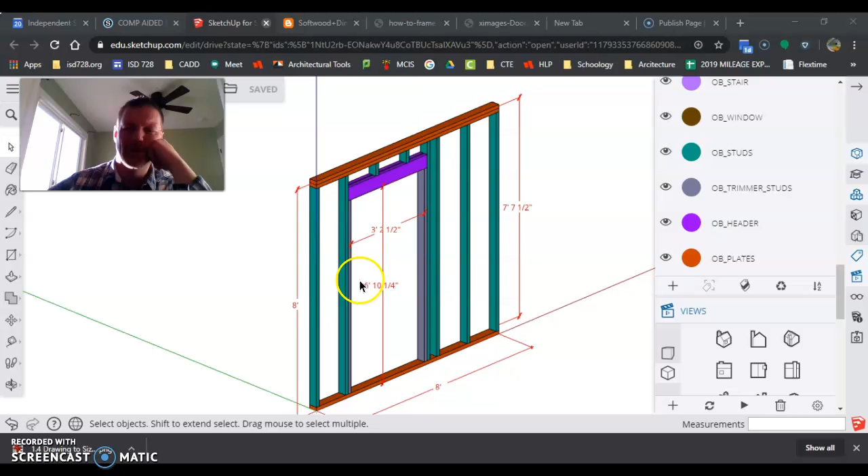We are moving forward now. We got our cripple studs in, we got all our objects on the right layers. Now we're going to put the sheeting on.

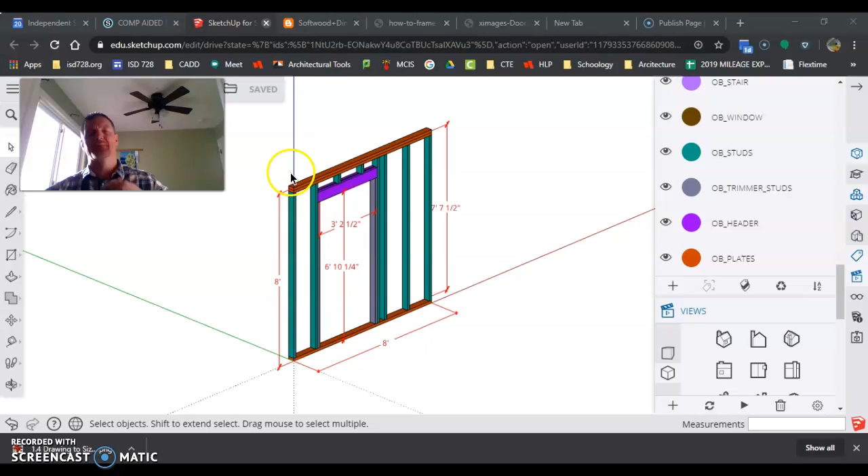So the sheeting comes into play, meaning we're going to put on this is a 2x4 wall, so we're going to put gypsum wallboard on each side, and we'll have that done. On a 2x4 wall, residential construction, it is 1/2-inch gypsum wallboard, so we're going to put that on.

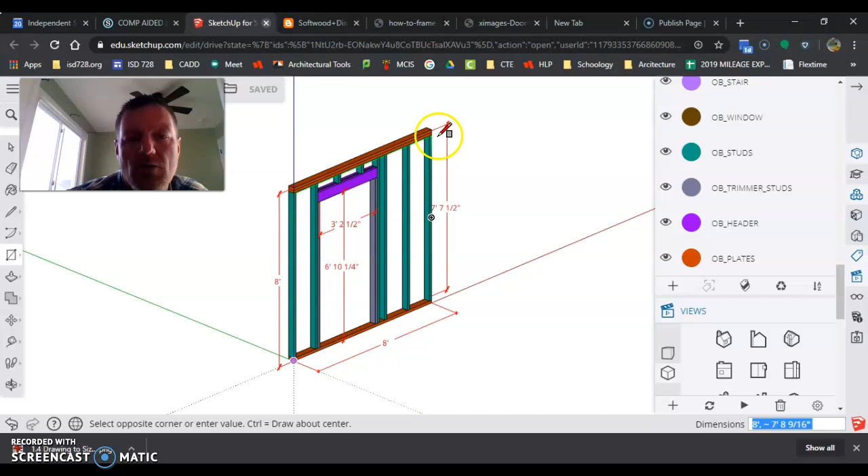And we typically do this, they come in 4x12 sheets, so they would come 4 feet high, 12 feet long, whatever, or 4x8 sheets, whatever. We're going to do this all in one. So I just click on rectangle, and I go up to the top, and I go push pull.

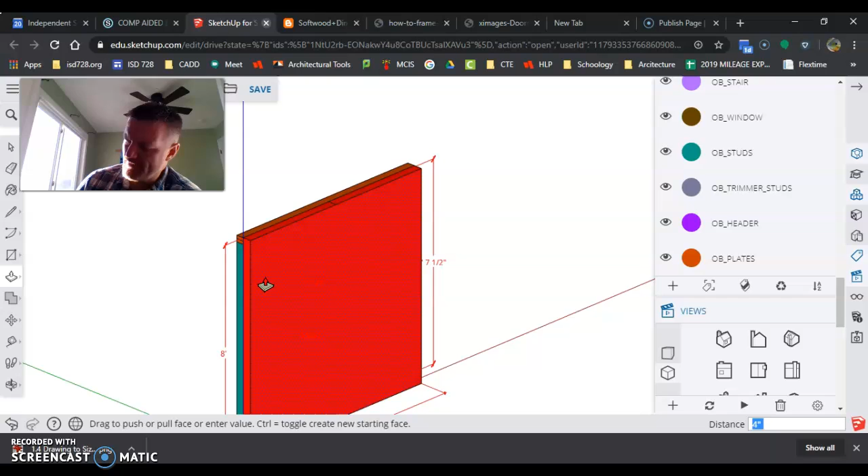And we're going to go 1/2 inch. 1 divided by 2. And there's our 1/2 inch sheetrock.

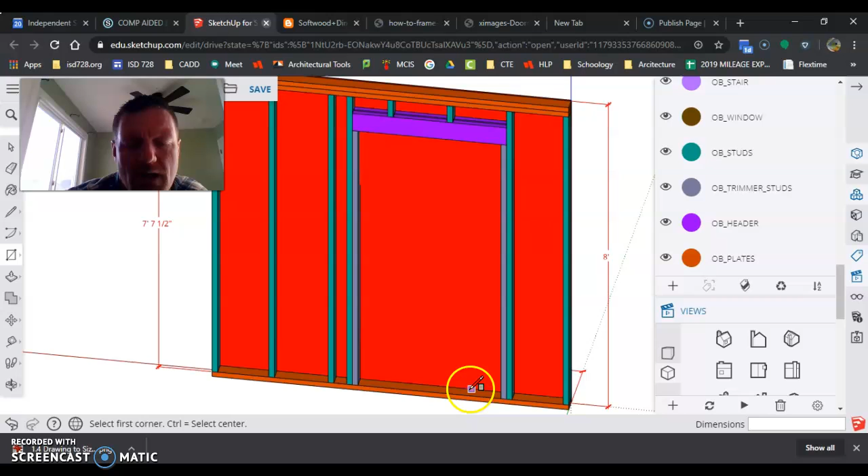Now, this being said, we have to draw the line to cut the door opening. And we actually have to do a little bit of cutting on this bottom plate too. But we'll start out with that.

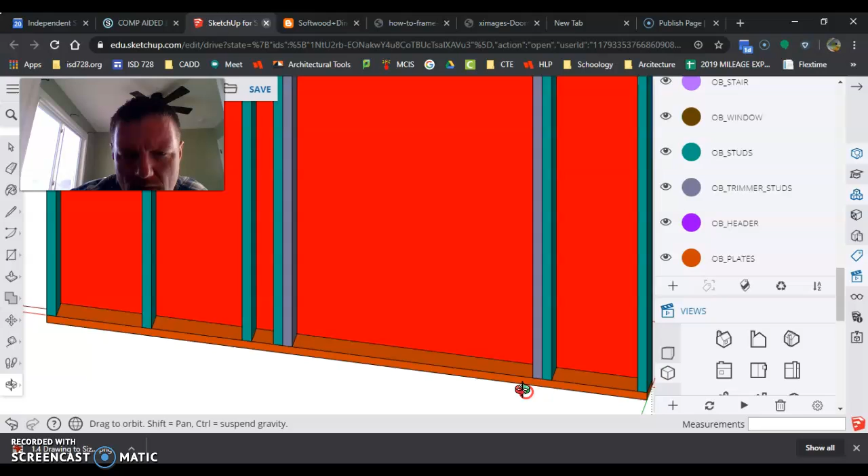So to cut on the bottom plate, we're going to right click on the plate and hit Make Unique. Then we're going to draw a line across, or actually straight down.

Oh, shoot. I messed up again. I made unique, but I didn't edit the component, so I got to double click on it to edit the component. But if you remember, we got that whole problem back here.

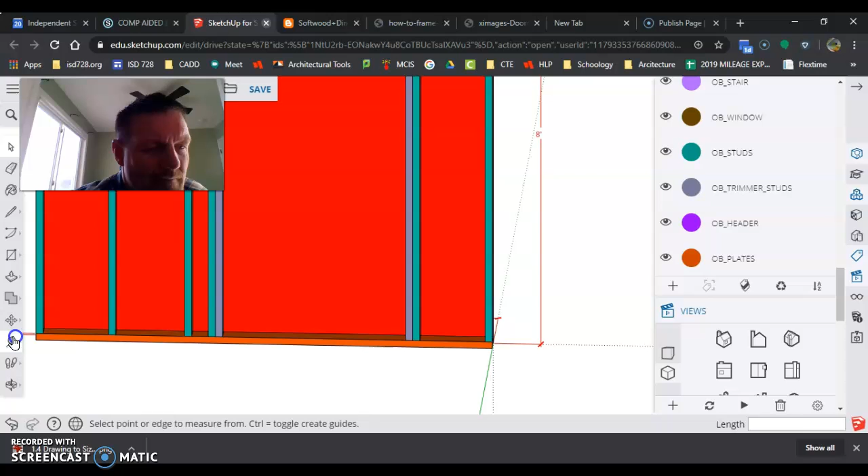So if I go here, that's 1 foot 6 1/4 inches to 4 feet 8 3/4 inches.

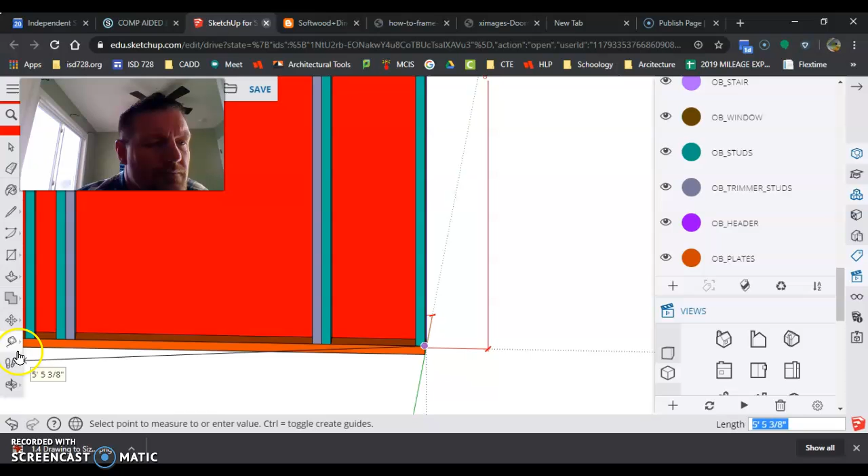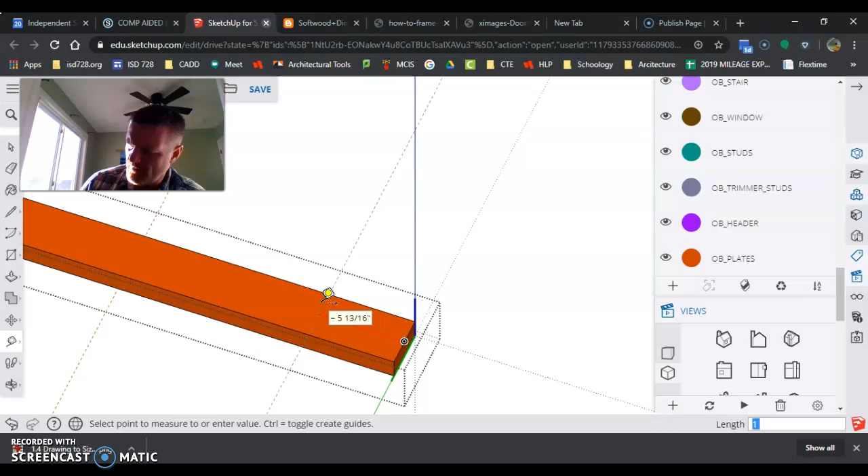Tape measure. Click on the end here, right on this blue dot for the midpoint. 1 foot 6.25 inches, that's 1/4. And then end here, 1 foot 8.25 inches.

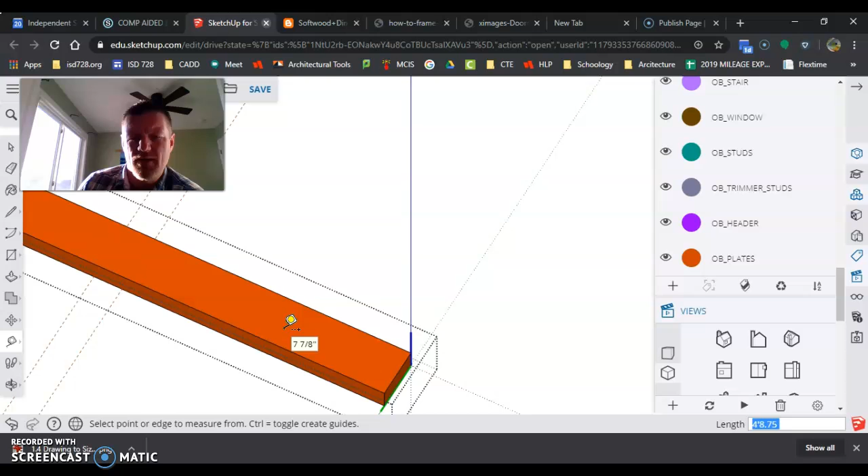Sorry, 4 feet 8 and 3/4 inches. Let's see if that looks about right. That looks right there. That looks right there.

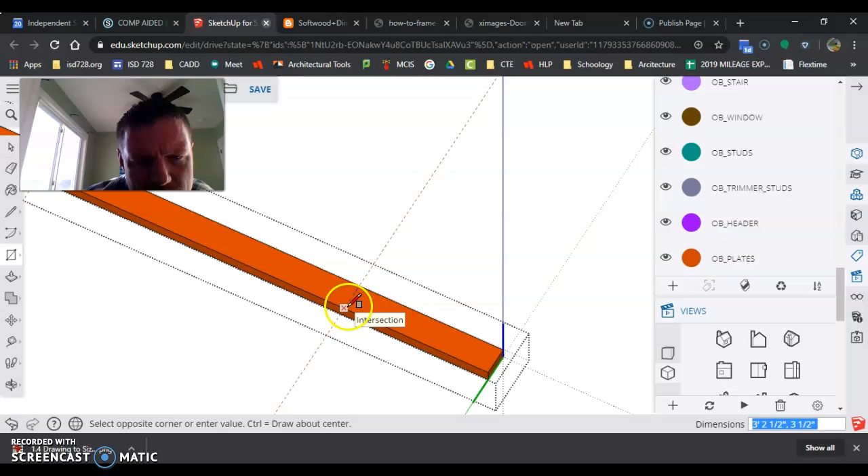Then we're going to draw a rectangle on the top of it, and we're going to cut that plate out. Then I can erase what I don't need there. So now we got that plate all the way cut out for that door, so you don't have to step over something when you walk through the door.

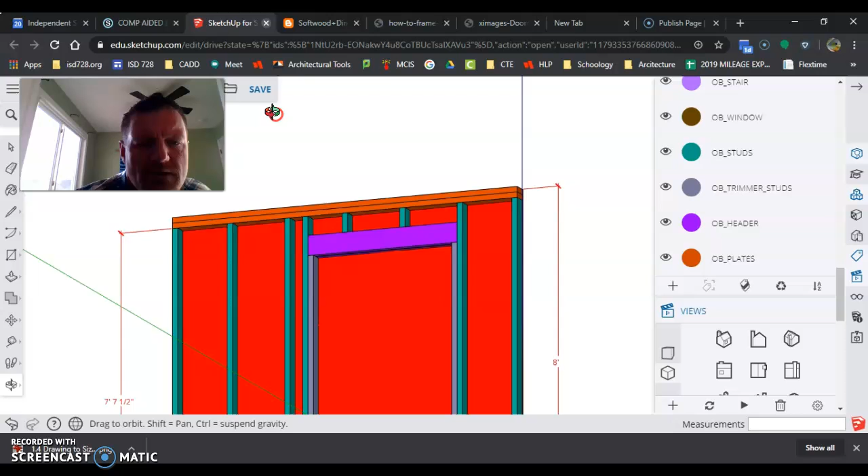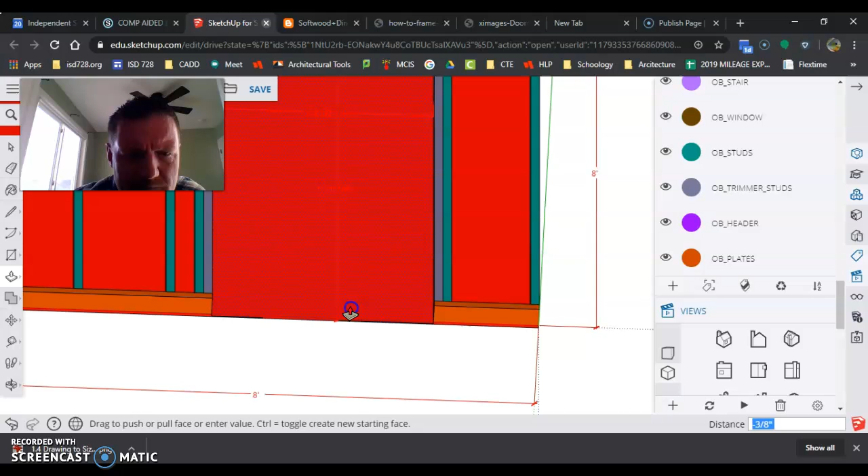Come up here. We're going to cut out that gypsum board, or most people call it sheetrock. Boom. Push, pull, and cut that out.

Sheetrock's done. What I'm going to do now is make a little kind of a wavy cut here to go through this so that you can see the studs on the inside, because this is a detailed drawing.

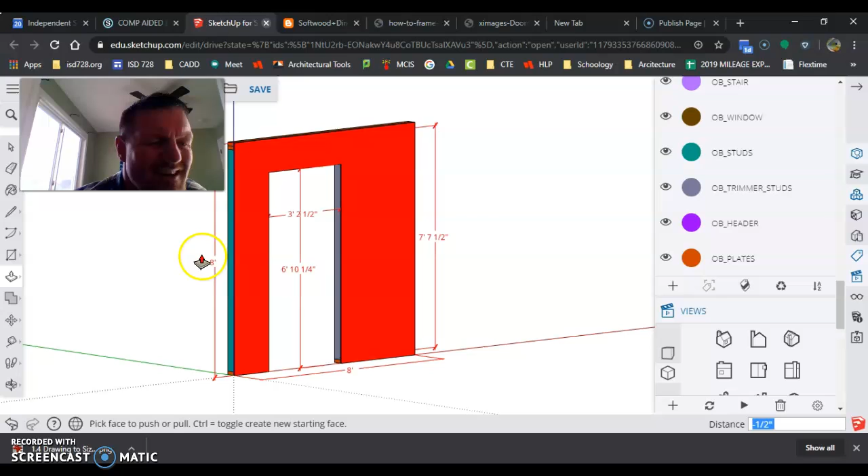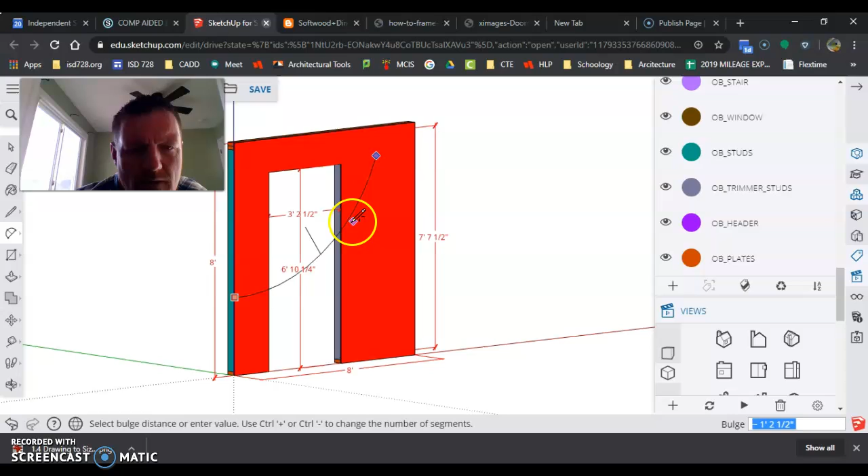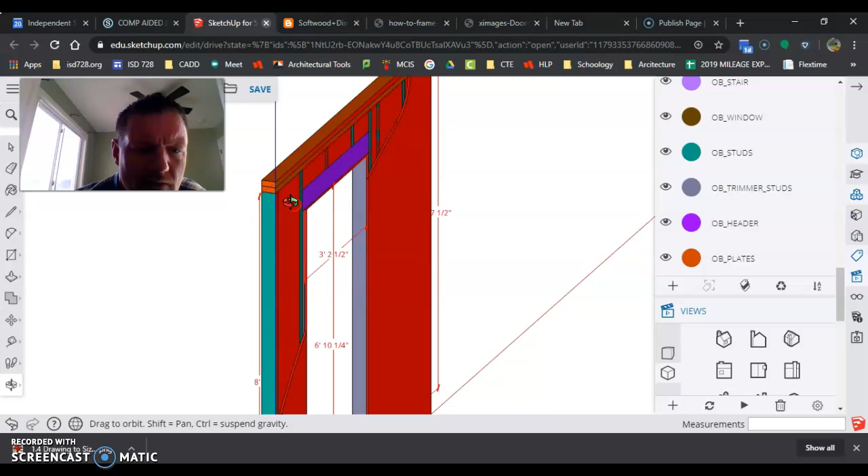So I'm going to use a 3-point arc, start somewhere in here, end somewhere over here. Keep it on this face. Push pull, cut that off, and use the eraser to erase what I don't want left here.

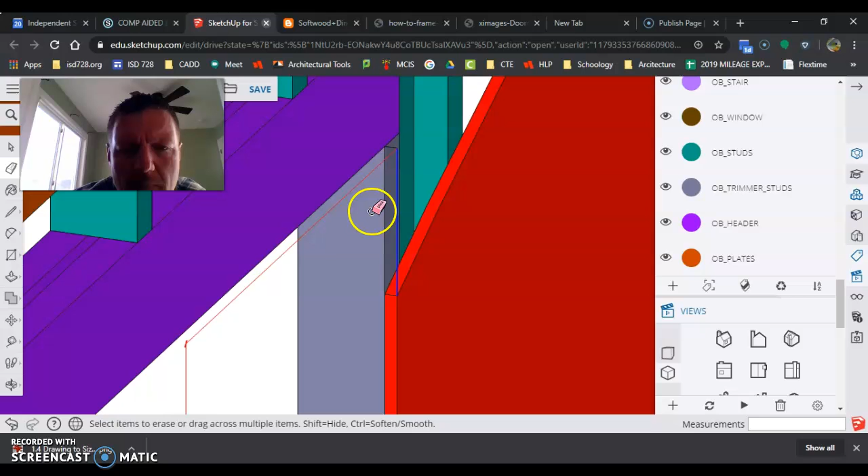Sometimes you can select and use the delete key. And I can see through, and I got a nice piece of information there.

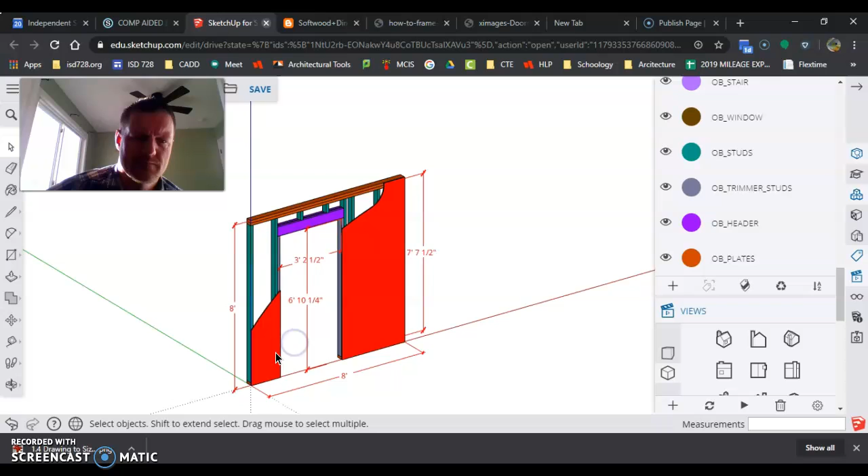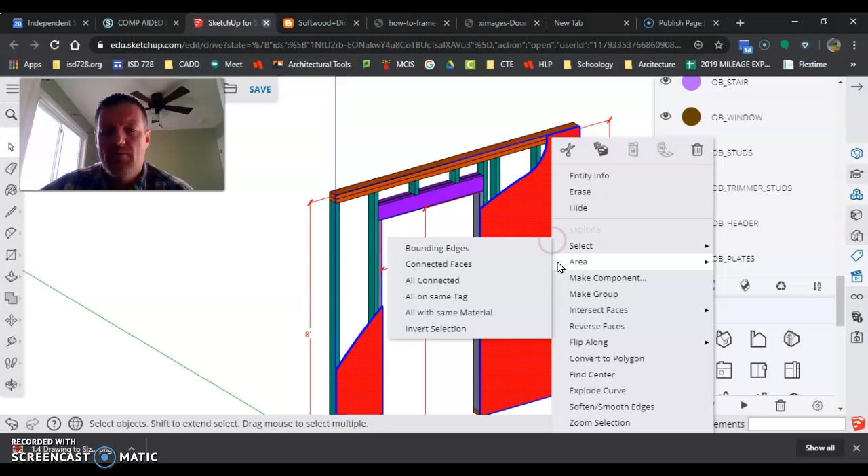So I'm going to triple click, hold down Shift, and I have those two pieces selected. And I'm going to right click, make component, call this Gypsum wallboard, and OK.

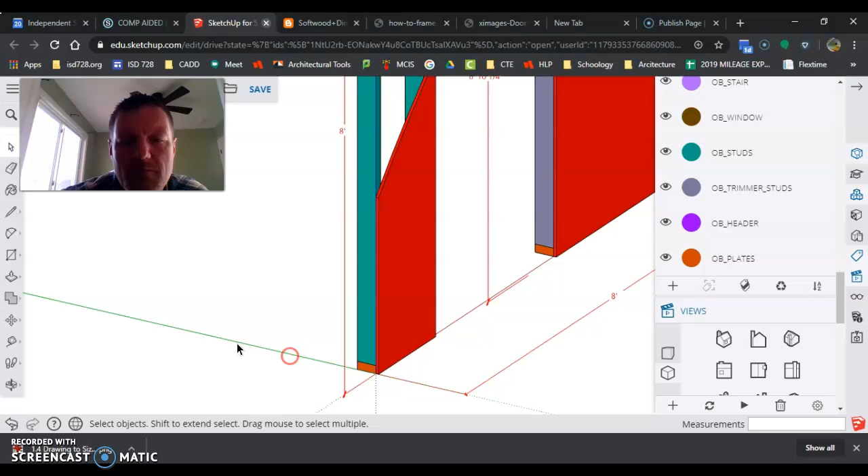And I'm going to do the same thing to move it to the back side. Just grab this corner right here, tap the control key, put it right on this corner right here. And I have the gypsum wallboard on the back side. There it is over there. You can see the studs are going through.

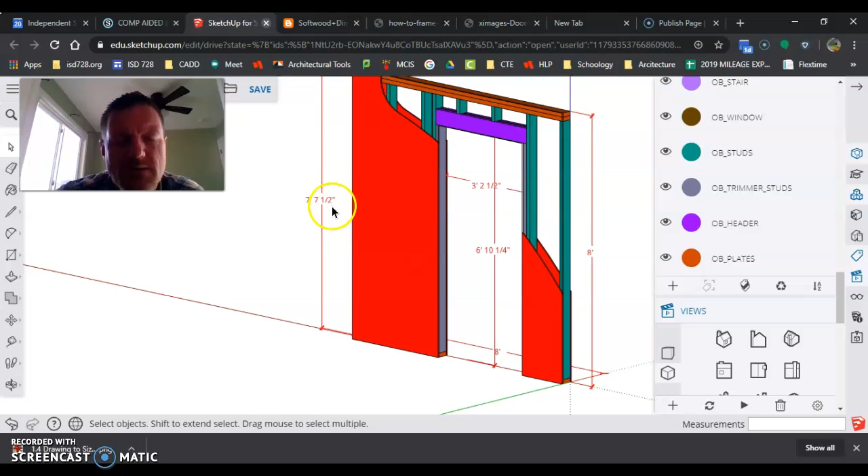And this, when I double click on it, edit it, I can kind of see a couple of the other lines that I had left over.

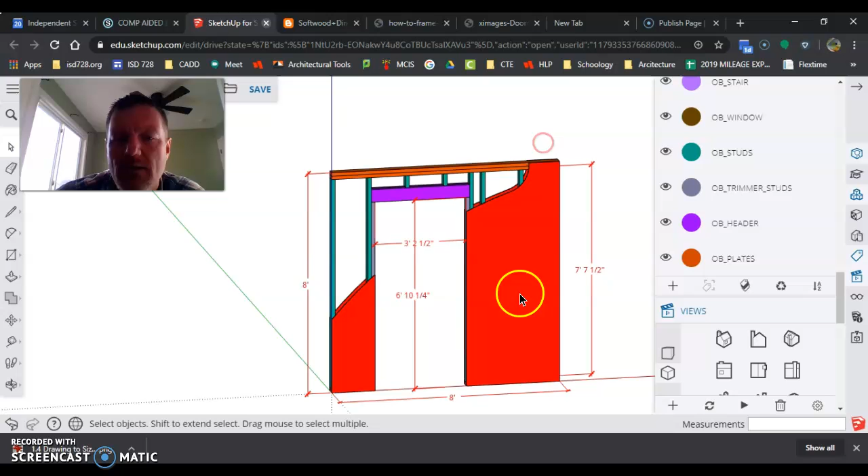Last thing I got to see is it's red right now, so I need to put it on a tag here. So I'm going to hit add tag, should add it all the way at the bottom. And we're going to call it the sheeting layer. So this is going to be the outside layer.

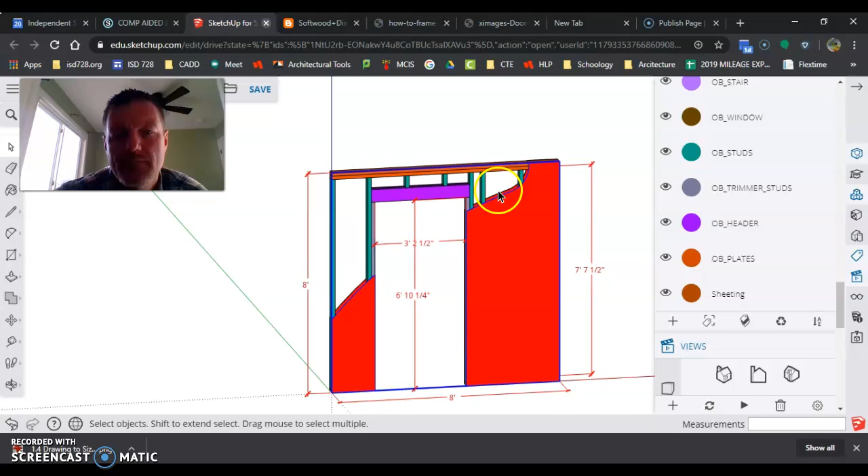Now hold down Shift and grab both sides, and notice it says those are untagged. We're going to go down to sheeting. I forgot to put OB in front of sheeting.